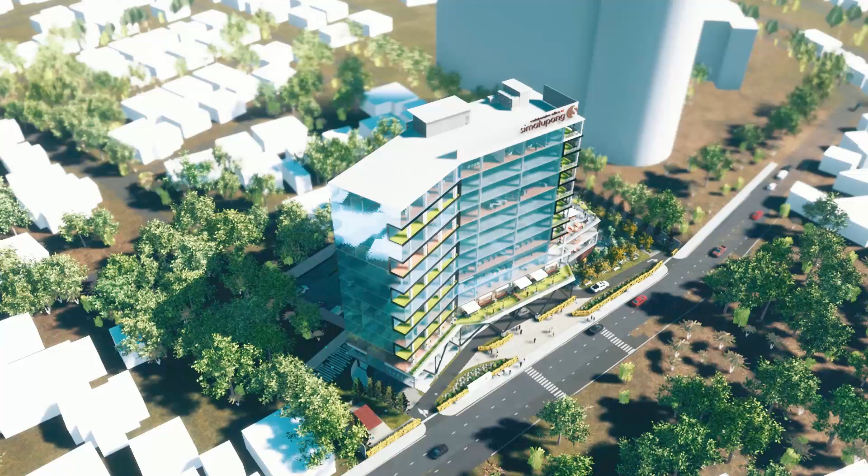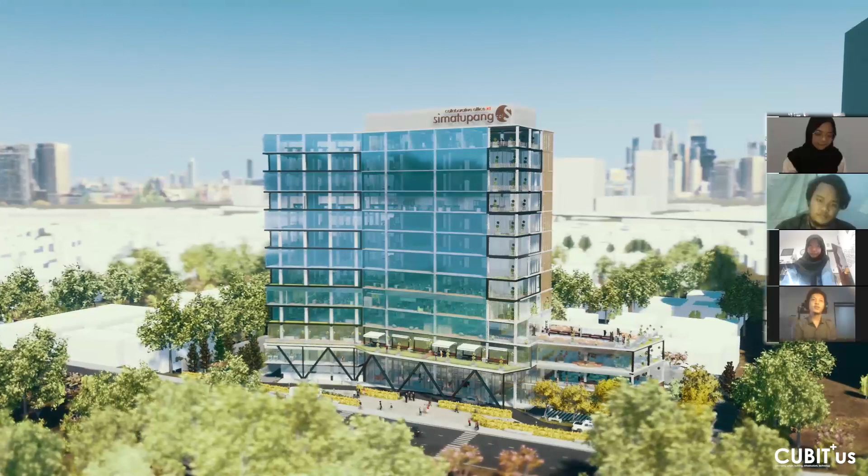Today's occasion, we want to present our project about Collaborative Office ID Simatupang. I am Ko Isriadi Olhak as the project leader. I am Adelia Bunaya, I'm Kamala Fitri Adelia. Me, Banu Arsyakila, as a member of CUBIT'us.

Moving to the project description, the Collaborative Office ID Simatupang is located in Jalan Nangka Raya, TB Simatupang, Tanjung Barat, Jagakarsa, South Jakarta, DKI Jakarta. The site area is around 4983 square meters and the building area is 13,989 square meters, and the budget is under 10 million.

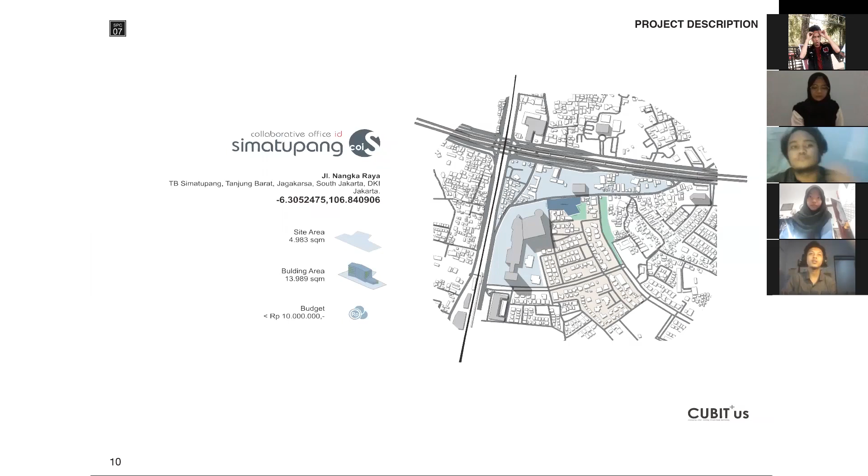Our building is located on Jalan Nangka Raya, near buildings such as Southgate Sinarmas and other office buildings, Universitas Tama Jagakarsa, Antam Building Residential, and Tanjung Barat Station, which is located near our site.

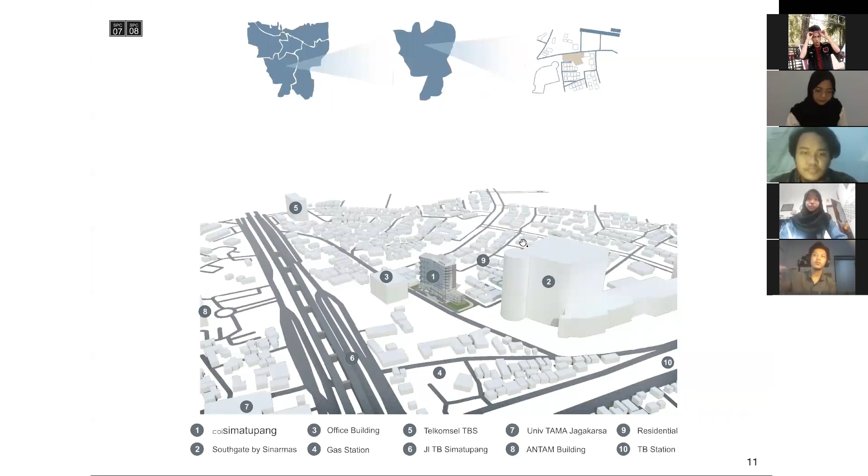As for neighbor context and access, our location is 500 meters from the main road of Jalan TB Simatupang, 700 meters from Pasar Minggu, Ragunan, Depok exit of Jakarta Outer Ring Road toll, and 500 meters from Tanjung Barat commuter line station. This will be the access going to our site.

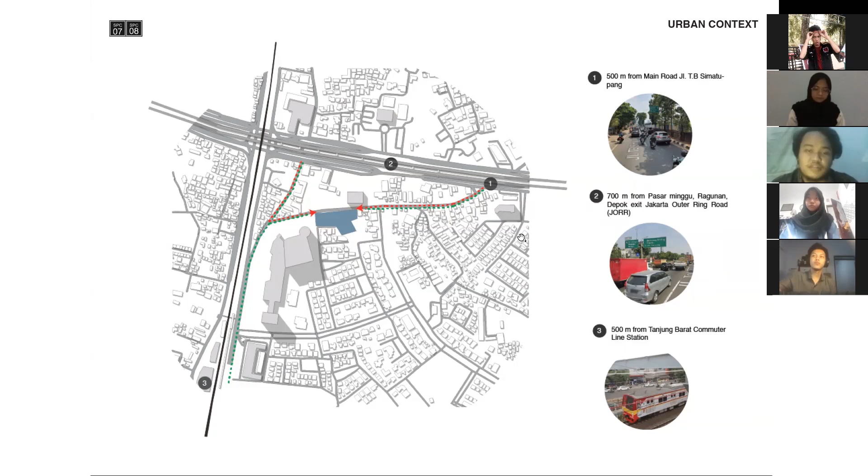Next is the building codes and regulations. Our ground floor ratio is 30%, and the floor area ratio is 3, which we maximize, along with the KTB and green coverage ratio. The site area is 4983 square meters and the building coverage is 1495 square meters. The maximum building height is 16 floors, and the basement floor ratio is 40%.

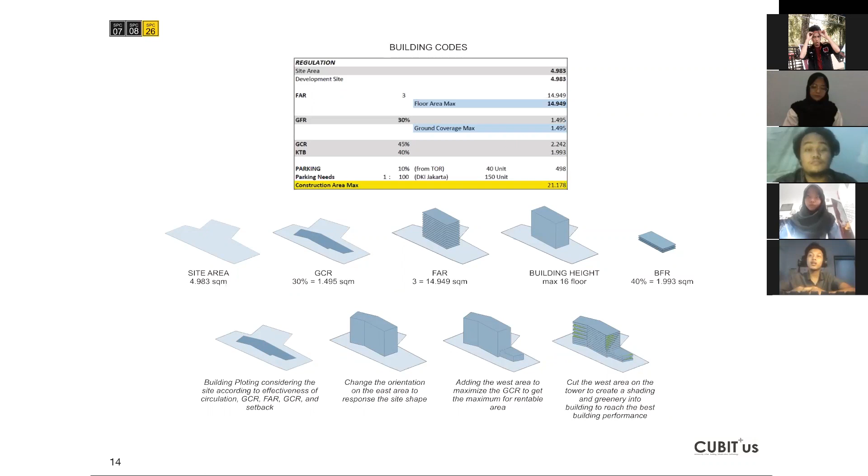For the building plotting, we considered the site according to effectiveness, changing the orientation on the east area to respond to the site, and adding the west area to maximize the ground coverage ratio to get the maximum rentable area. We cut the west area on the tower to create shading and greenery into the building to reach the best building performance.

For the typology and precedents, the first one we chose is Talavera Office Park as our precedent, located in TB Simatupang. The second one we chose is Satrio Tower, located in Jalan Profesor Dr. Satrio, Jakarta Selatan. For the third one we chose Google Office California as our precedent, located in California.

The reason we chose these three precedents: first, Talavera Office Park, because it has convenient circulation inside the building. Second, Satrio Tower, because it is a green building. Last, Google Office, because it has a fun office concept that we can apply to our building, and it is suitable with our concept.

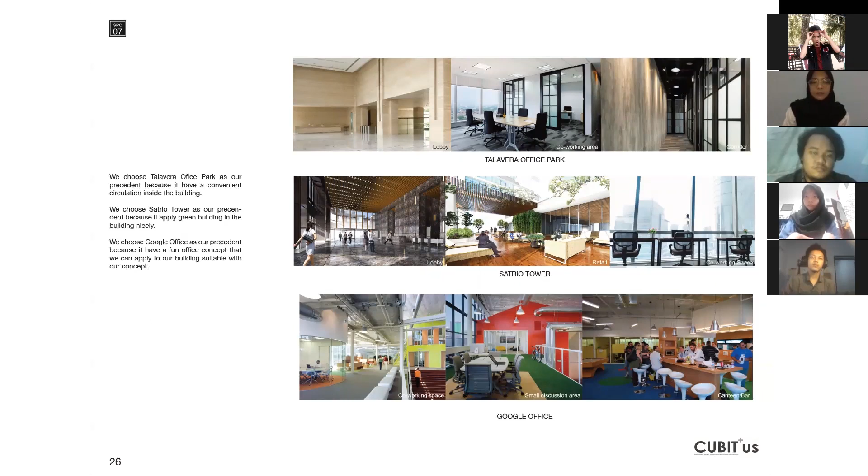Next is the TOR review. As you know, the rental office needs the process of working in a fixed office complete with a concept of co-working space and lifestyle, in accordance with the demands of millennial users, with single tenancy floor and multi-tenancy floor in the rental office, also providing co-working space that can handle medium and large office co-working areas. The office can also enhance productivity and give flexible activities and interaction with each other.

From the TOR, it's 5% needed for the entrance lobby, and we built 463 square meters. From the TOR it needs 999.

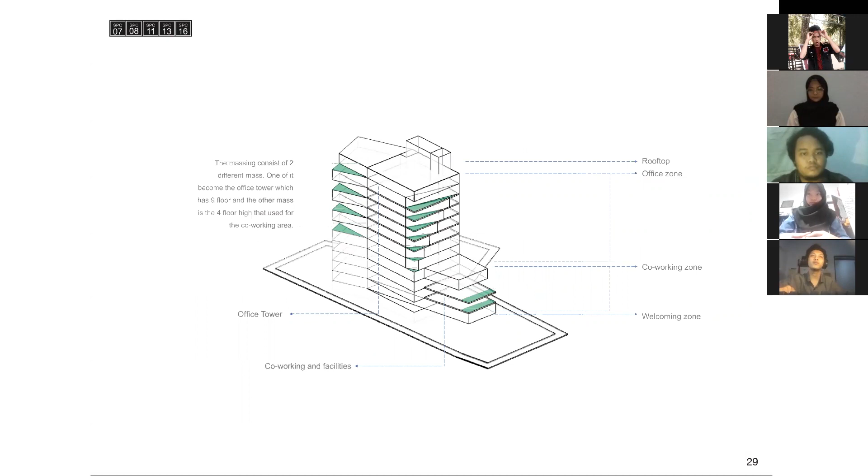This is the massing of our building. It consists of two different masses: one becomes the office tower, which has 9 floors, and the other mass is 4 floors in height, used for the co-working space.

Here's the property size. We have the office area around 8161 square meters and the co-working area around 2240 square meters, with the total building area at 13,989 square meters. The rentable area of our building is 74%. In the office we have 9 floors, in the podium 4 floors, and the basement 2 floors, for a total of 15 floors with a total height of 55 meters.

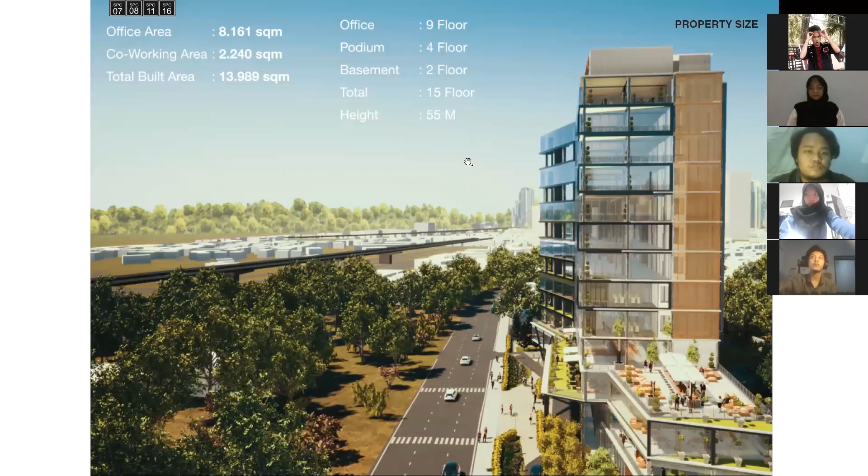Goes to the concept and idea development. We have the concept of interaction that creates collaboration, innovation, productivity, and enhances involvement and productivity.

We have the design approach for the industrial and green building. Why industrial? It has a unique aesthetic of honesty in the characteristic of its building material, expected to create an honest work ethic and bring up original ideas. For the green building, it can bring freshness for our mind and the physical.

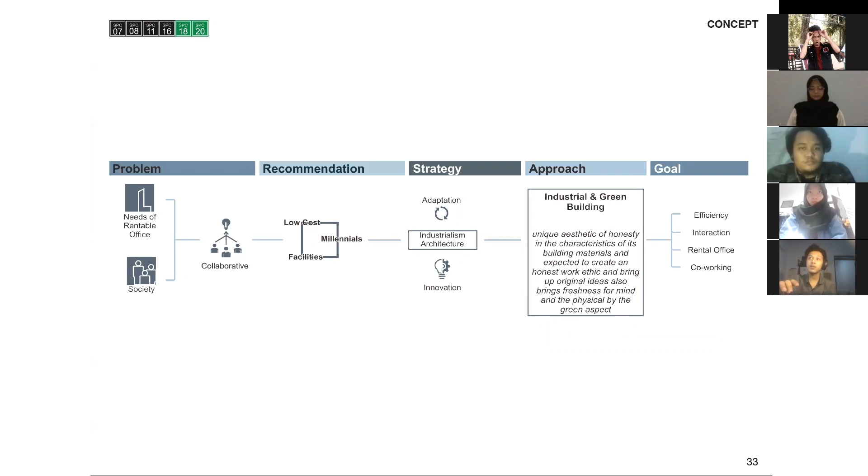We have the problem of the needs of the rental office and the society. For the recommendation, we need to get low cost for the millennials and provide a lot of facilities. Our strategy is industrialism architecture, our approach is industrial and green building, and the goal is efficiency, interaction, the rental office, and the co-working.

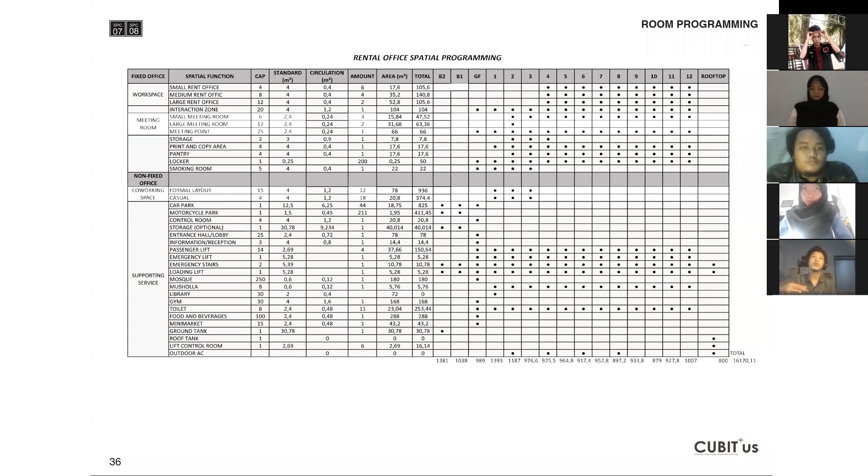For our room programming, we have the fixed office and the non-fixed office. The fixed office has the workspace and the meeting room, and the non-fixed office has the co-working space and the supporting facilities.

We have Tokopedia as our main tenant. Tokopedia is an online marketplace, one of the most influential. The building provides a space for the stores that have partnership with Tokopedia, so they will have easy communication between the owner and Tokopedia itself.

The calculation of the building system. For the structure, we use a steel structure as our main structural system, combined with a concrete system, mostly for the basement area.

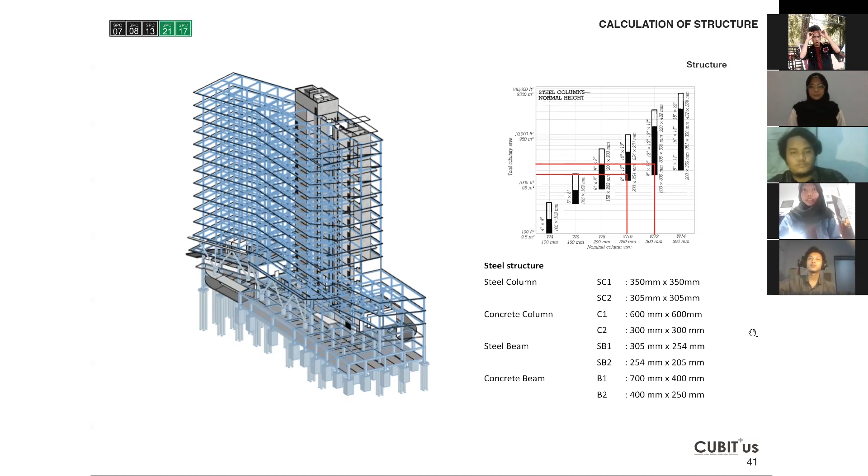Parking calculation, based on the TOR, the client needs 10% of the parking area consisting of drop-off and indoor parking area. For the drop-off, we have 6 cars in total with an area of 112.5 square meters. The car parking area has 825 square meters with a capacity of 44 cars, and the motorcycle parking ratio is 1 per 3, with a capacity of 211 motorcycles.

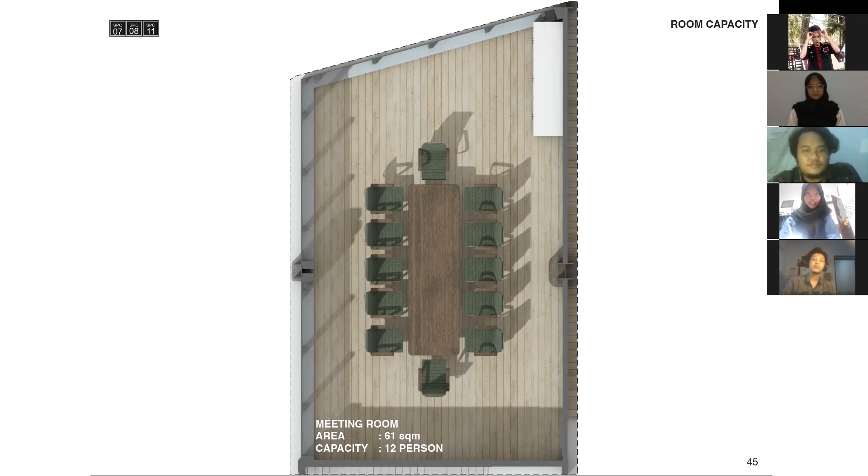This is the room capacity. The meeting room has an area of 61 square meters and a capacity of 12 persons. Next is the large room, with an area of 130 square meters and a capacity of 12 persons. Next is the medium one, smaller, for only 8 persons with an area of 100 square meters. And the small office consists of only 4 persons with an area of 60 square meters.

Based on this calculation, you can see that we use 4 lifts.

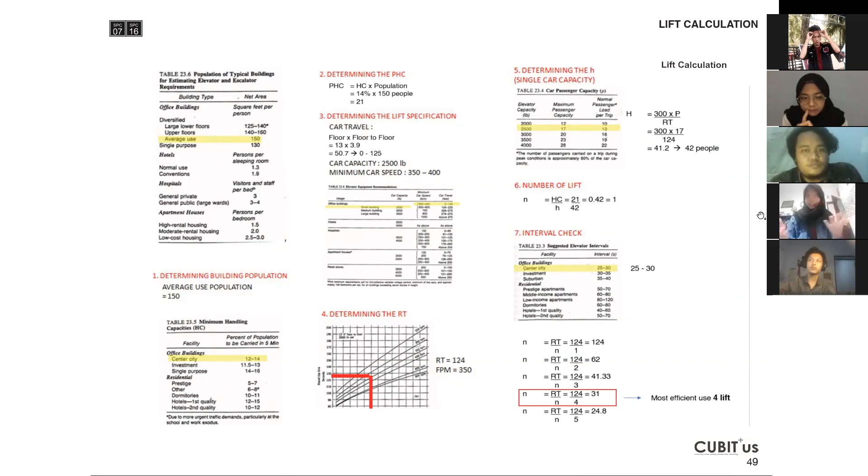For the welcoming zone, service equipment, and co-working zone, we have the entertainment, mosque, food and beverages, gym, and co-working area that consists of indoor and outdoor co-working.

In the office, we have the main tenant on 2 floors, and the rest is multi-tenant office. In every office, we have the green balcony at the west part of our building.

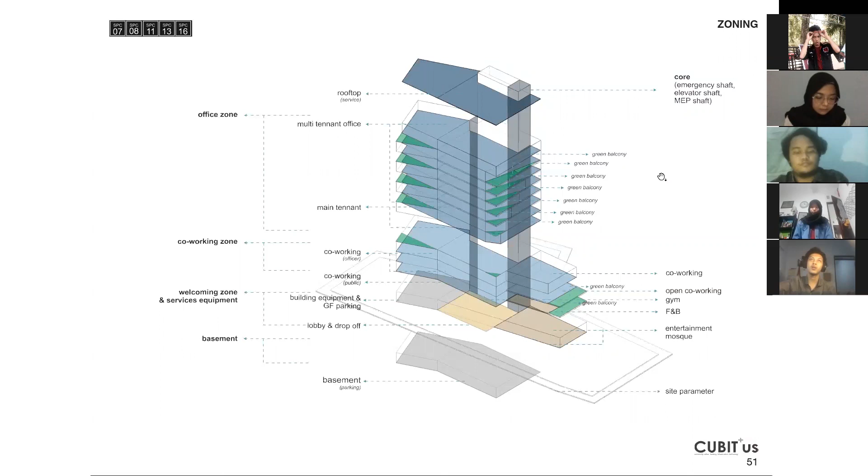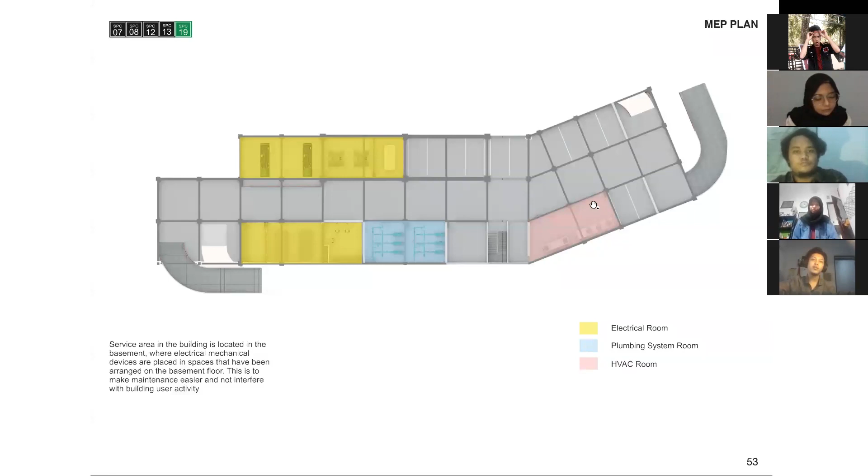For the barrier-free concept, easy access must be achieved for persons with disabilities, starting from the entrance, the site entrance to the building. There's a guiding block that's helpful for them.

In addition, we have ramps that increase the ease for persons with disabilities to enter the building, placed on the side of the building. The yellow one is the guiding block, the blue one is the diffable ramp, and the last is the diffable parking. We have 6 disable parking spaces in total.

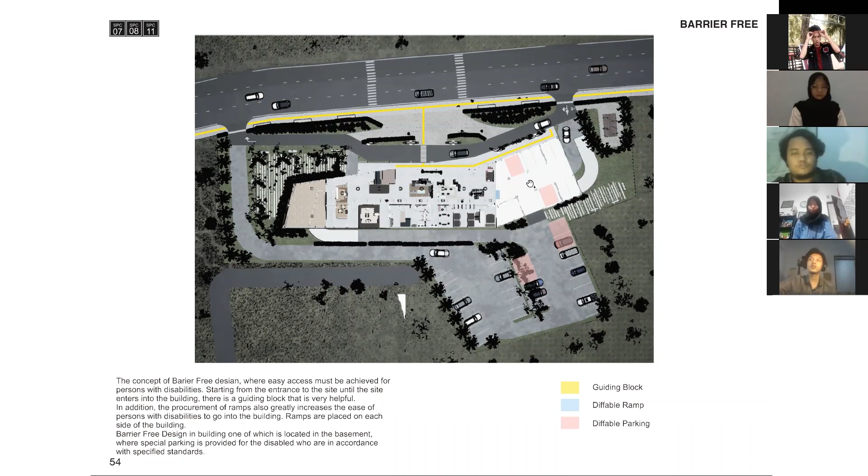For the module, it's based on the structural material, plumbing material, flooring, ceiling material, and many more.

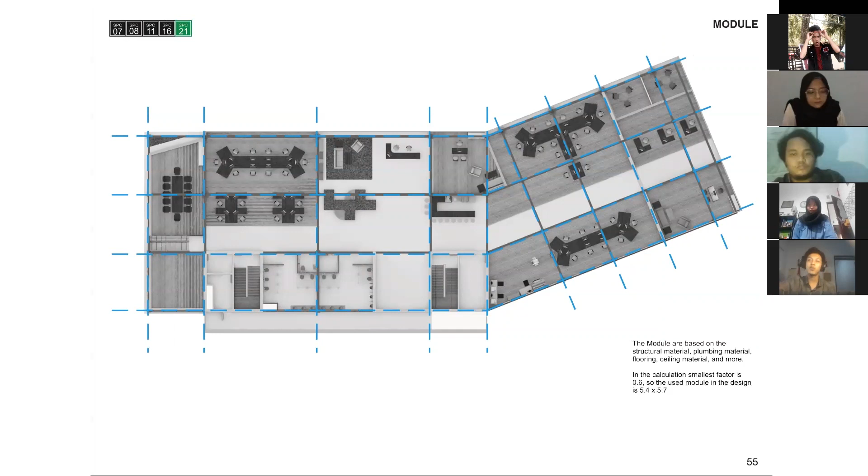In the calculation, we got the result of the smallest factor at 0.6, so we use the module in design that is 5.4 meters by 5.7.

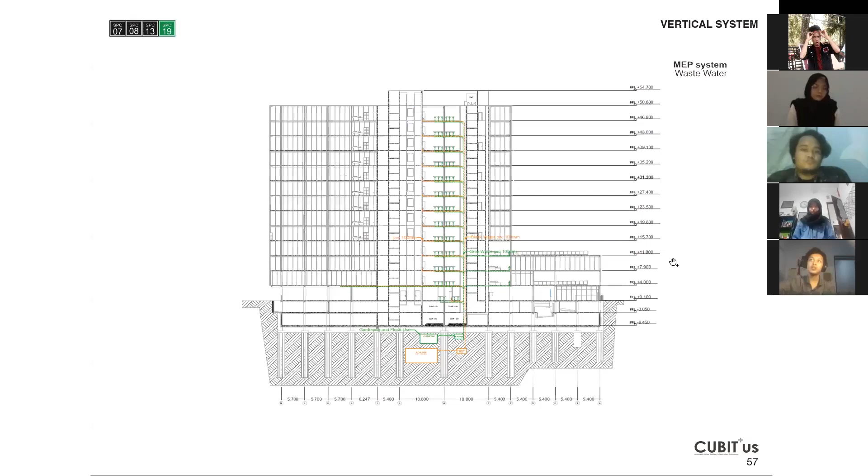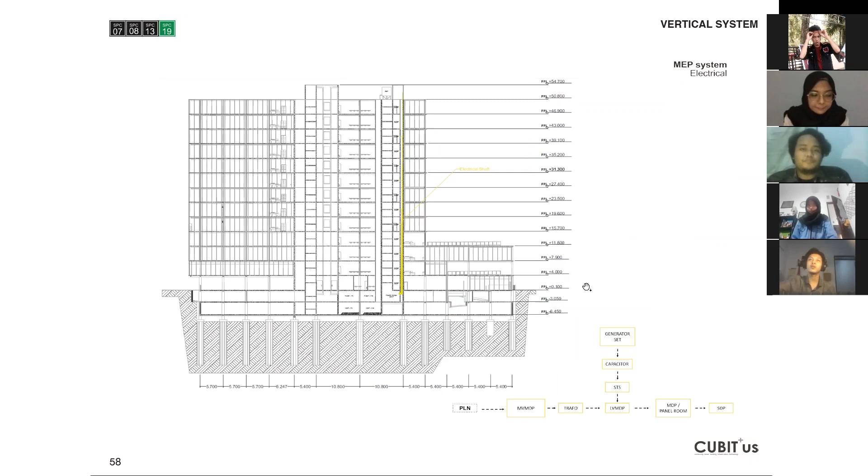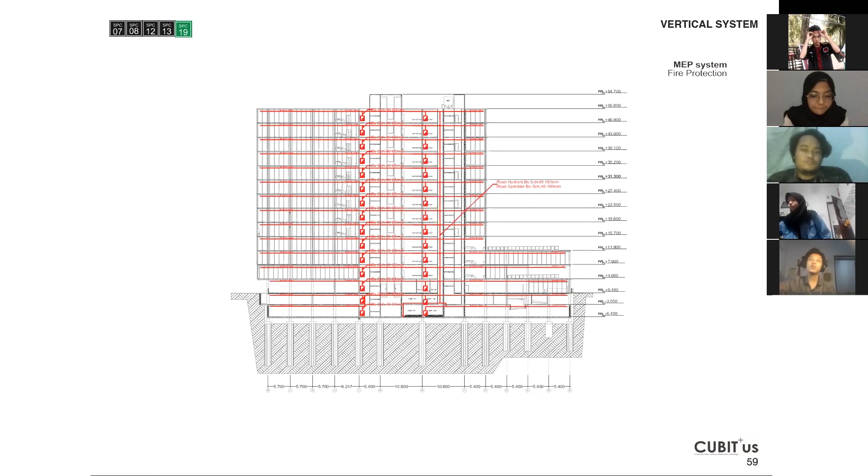And goes to the SDP on every floor. This is for the fire protection. We have water from the groundwater tank for the fire hydrant, pumped with the pump in the pump room, and then distributed all over the building to the sprinklers and also the fire hydrant.

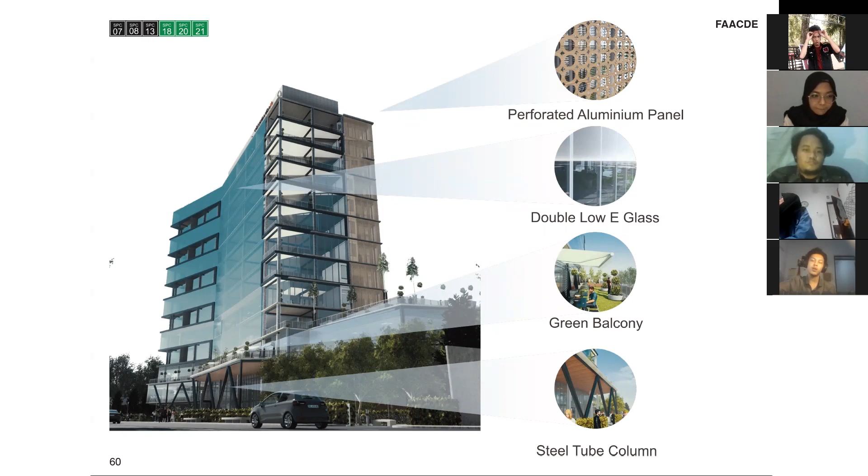And then goes to the facade. We are using the perforated aluminum panel, double low-E glass, green balcony, and also steel tube column. The green balcony provides freshness of mind for the occupants.

For the green building aspect, we use these three elements. The first is double low-E glass. It reduces the heat from sun radiation to create a comfortable condition inside the building, and also reduces the energy use for air conditioning. It also maximizes natural lighting penetration, which helps reduce energy use inside the building.

For the ACP secondary skin, we are using the perforated aluminum panel. It reduces sun radiation while keeping light coming into the building. The last element is the green balcony, which brings greenery to every level to give freshness to the occupants while they are working.

The next is our design development. The first plan is the basement 2 plan, which consists mostly of parking area for both car and motorcycle. On this floor, it is also used to store the groundwater tank.

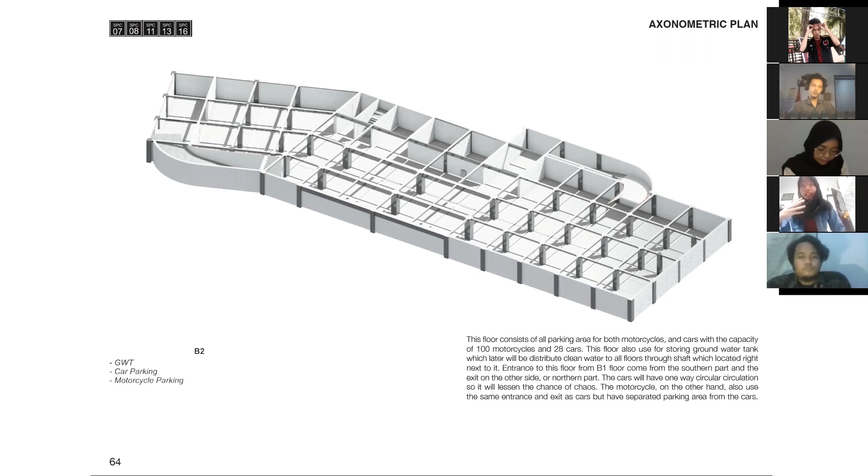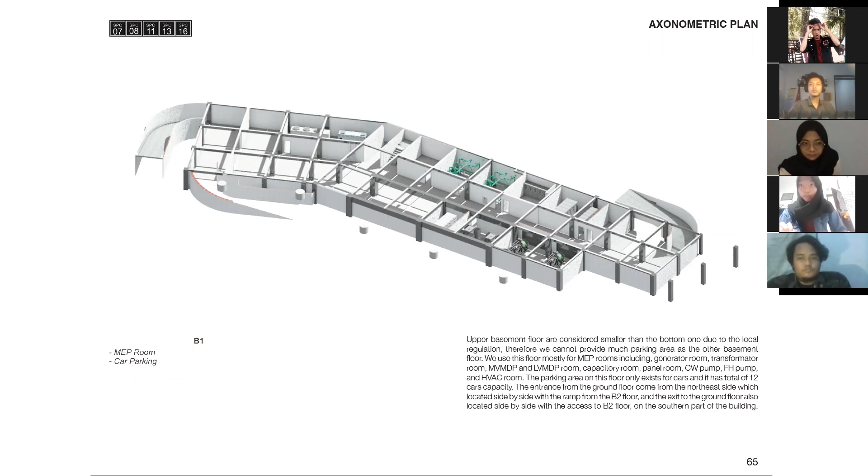The next is the upper basement floor, and this is considered smaller due to local regulation. Therefore, we cannot provide as much parking area as the other floor, and we use this floor mostly for MEP rooms.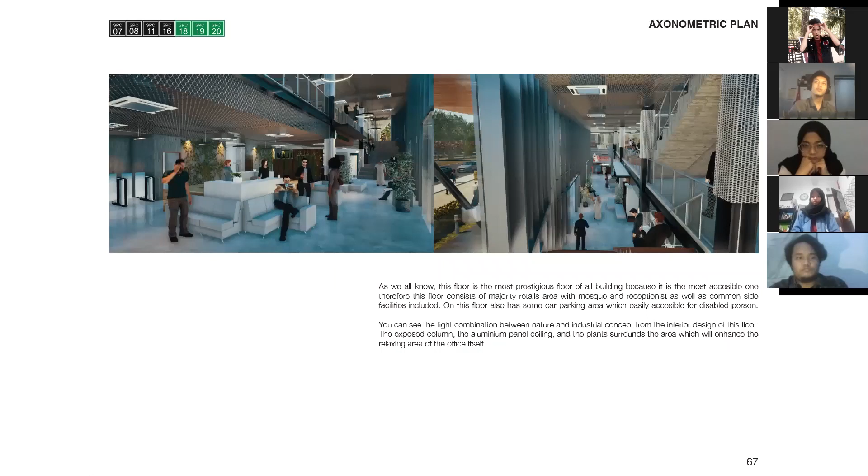Going to the first floor, it consists of indoor and outdoor co-working spaces. On the right side, you can see circular sofas, and we have food and beverages as well, and a gym. We also have retails under the stairs.

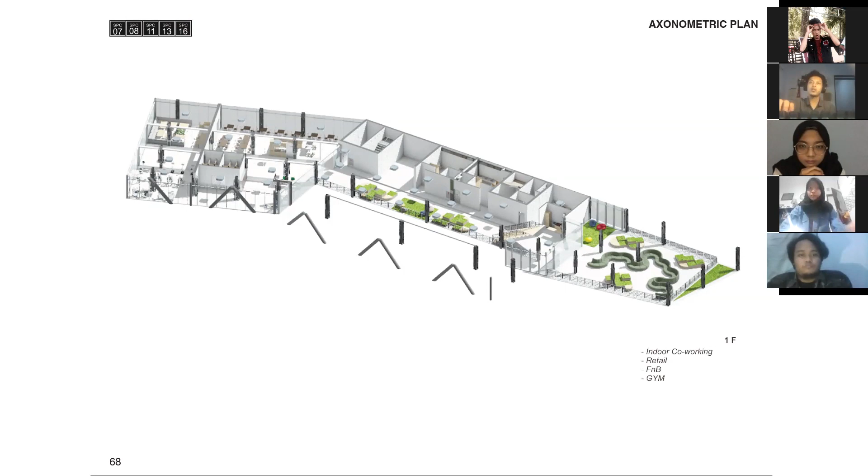You can see right here the co-working space that is available starting from this floor until the third floor. On the right picture, you can see the lobby area through the railing. On the left side, there's a more casual co-working area located outdoors, showing the implementation of our concept.

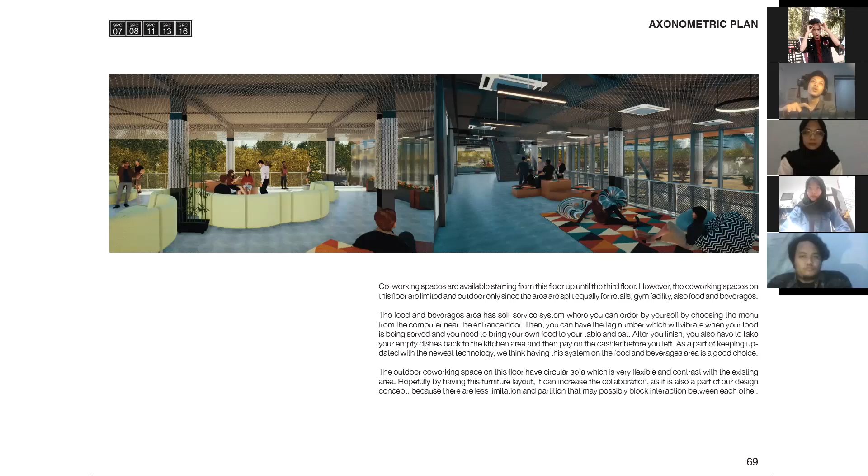The next is the second floor. Here we have outdoor co-working, indoor formal co-working, and an entertainment area. The second floor has the biggest area of co-working space compared to the other two floors. There are also small linear co-working spaces on the northern side of the building, which has a view of the main street.

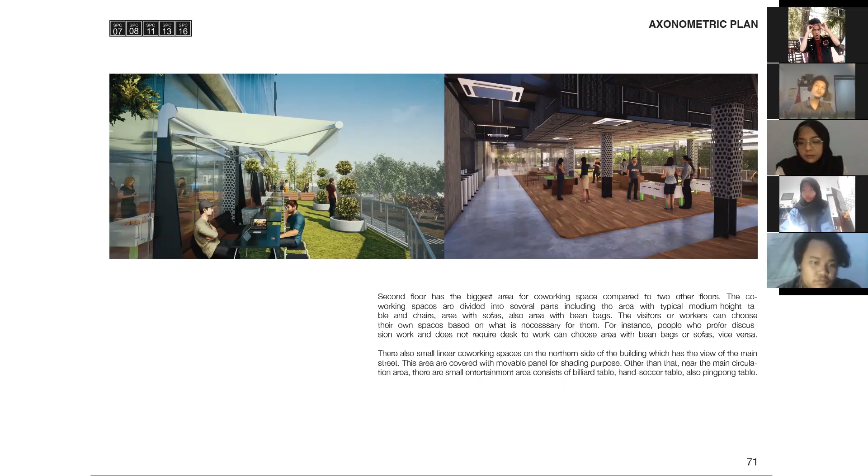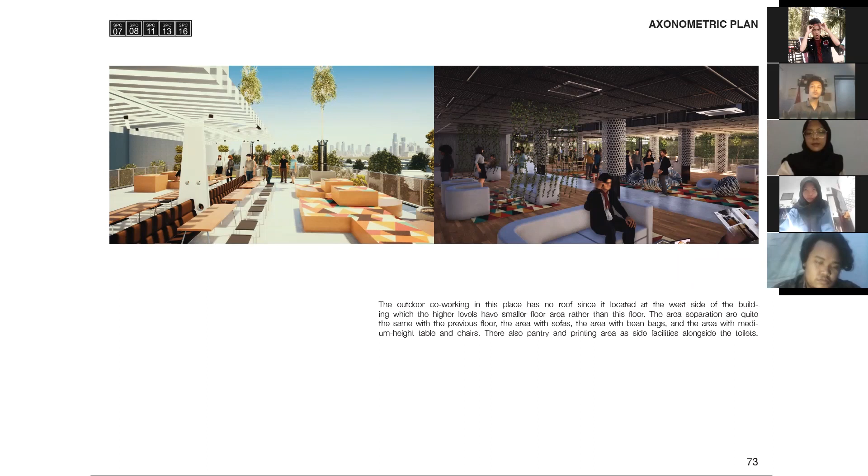Near the main circulation area, there is a small entertainment area consisting of a billiard table, hand soccer table, and ping pong table. The next is the third floor, which has indoor and outdoor co-working space. The outdoor co-working area on the third floor has no roof. There are also a pantry and printing area as side facilities, alongside the toilet.

Starting from the fourth floor, this area will function as an office, specifically as the office of our tenant, Tokopedia. It consists of a lobby, single workstation, multi-workstation, private office, meeting room, and communal spaces. Starting from this floor up until the fifth floor will be occupied by the tenant, providing the design of Tokopedia with green as the main color, reflecting Tokopedia itself.

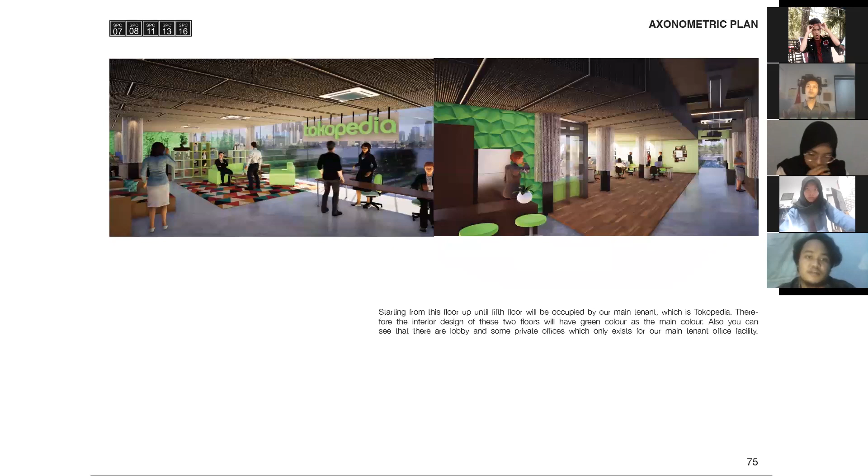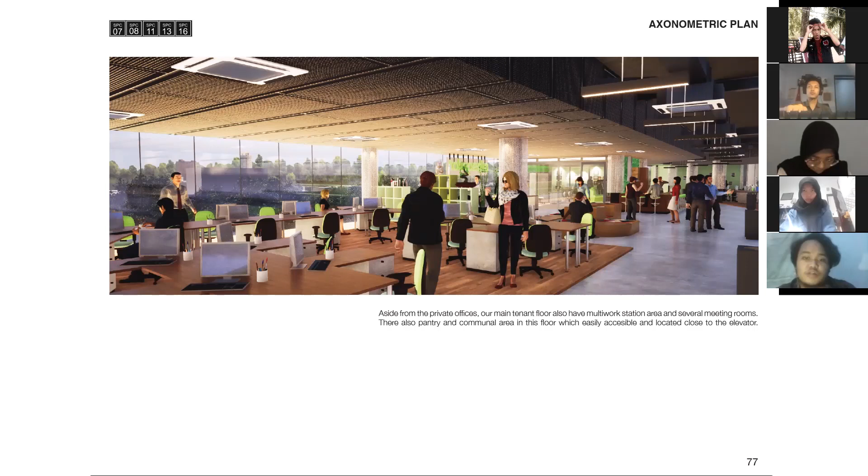On the fifth floor, also functioning as the Tokopedia offices, it consists of single workstation, multi-workstation, private office, meeting room, and communal spaces. The fourth floor also has a multi-workstation area and several meeting rooms, plus a pantry and communal area that is easily accessible and located close to the elevator.

Starting from the 6th floor until the 11th floor, this will be used as multi-tenant rentable office space. It consists of one large communal space next to the main circulation, one large office, two medium offices, and three small offices. Besides the offices, this floor also has side facilities such as toilets, musola, printing rooms, and pantry.

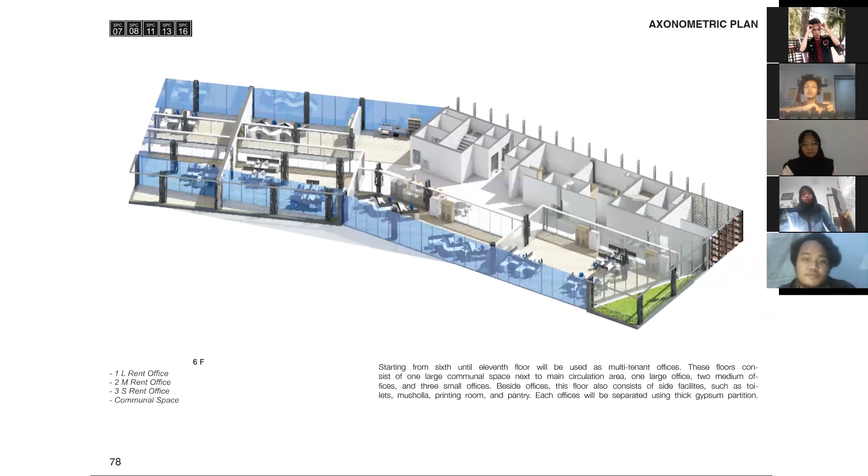On the 12th floor, it also functions as an office, but here there are three rentable meeting rooms, and also a communal sky view on the west side. This floor has quite the same layout as the typical floors, but some rooms were cut off because of area differences.

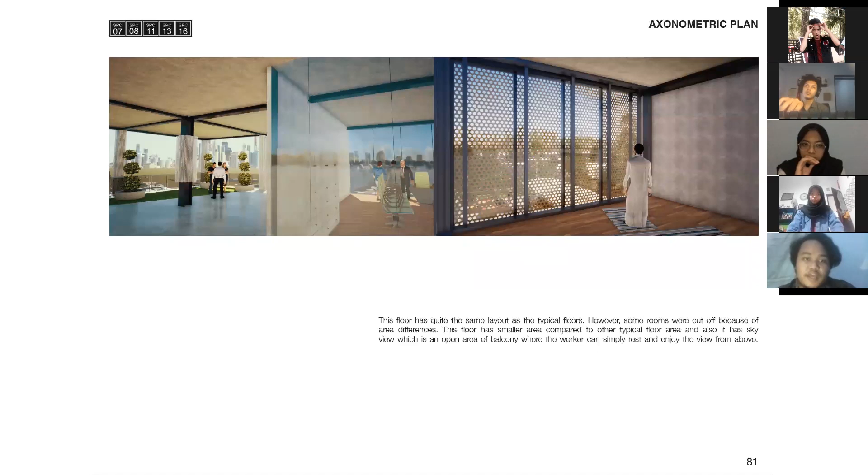As you can see on the left side, there is a picture of the sky view, so the workers can enjoy this sky view that we are providing in our design. On the rooftop will be the elevator machine room, building maintenance unit room, and also roof tank and pressure fan. Here is our elevation.

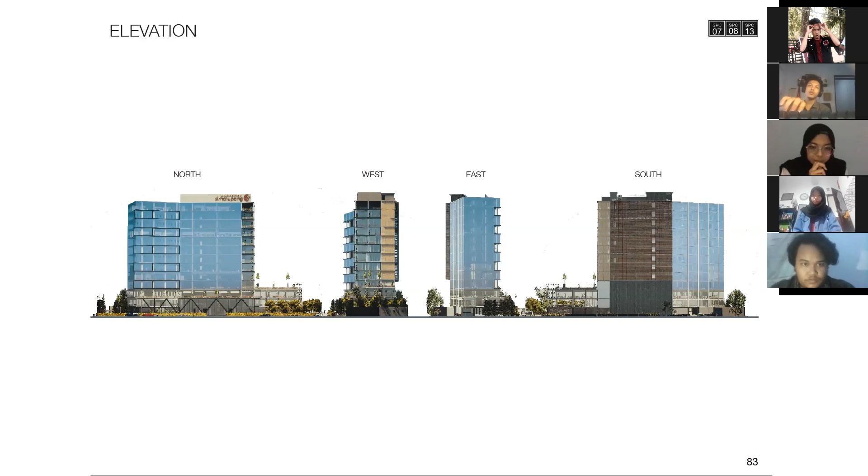You can see from the north the building name. Then from the west, you can see our building, and that's from the east side and also from the south side. This is our section.

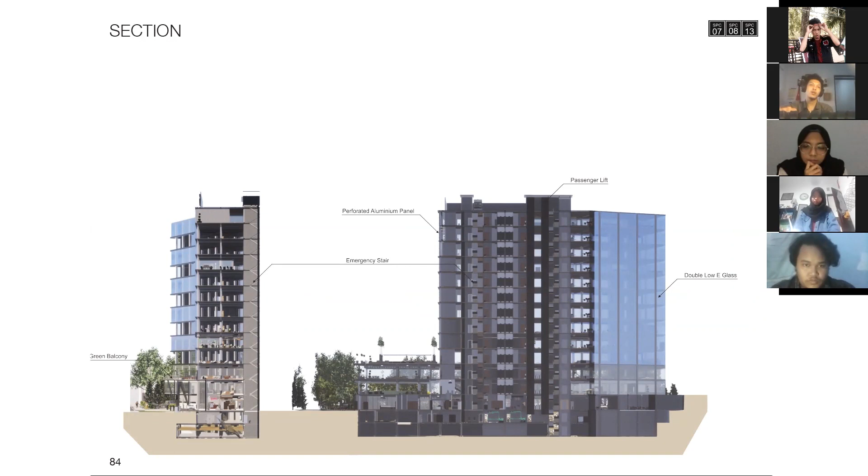There's the emergency stairs, and we have the perforated aluminum panel, and also the passenger lift, and we are using double low E glass. You can see on the left section, the green balcony also facing the front of our building.

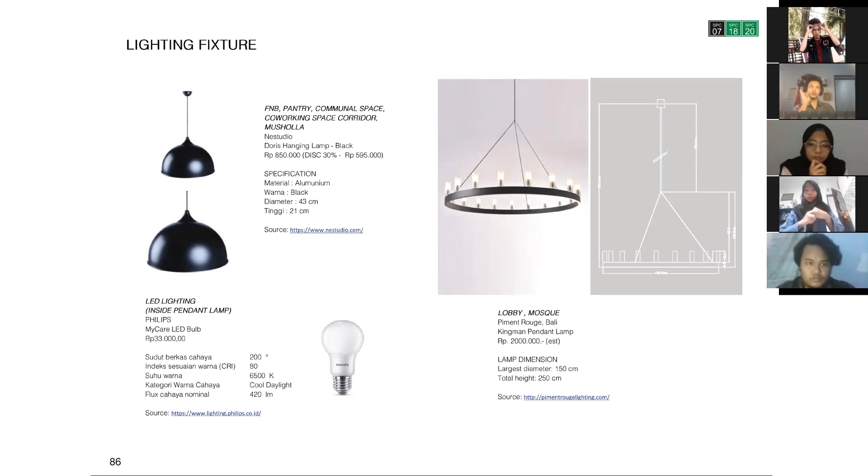Next goes to the material specification. First we go to lighting fixtures. There are two kinds of pendant lamps. The small one is used in F&B, pantry, communal space, co-working space, corridor, and musholla, while the big pendant lamp is used only in the lobby and the mosque.

The LED lighting used for the big pendant lamp, and the LED lighting on the right side is used for the office area. Downlight is used in retail, gym, toilet, and management room. For the circulation lighting, we use the bar lamp for all circulation areas.

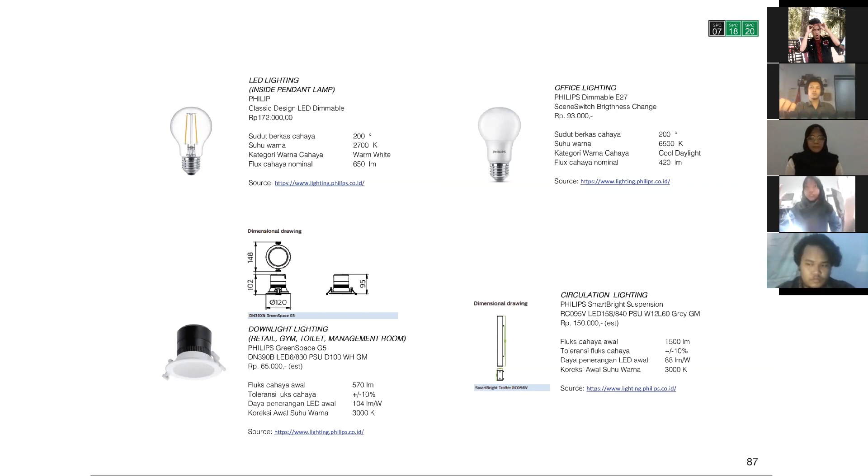Next is the sanitary fixture, mostly using American Standard. For the wastafel, we are using a set from American Standard. For the wall tap, we are using Air Koran Tembok. For the floor drain, we are using American Standard.

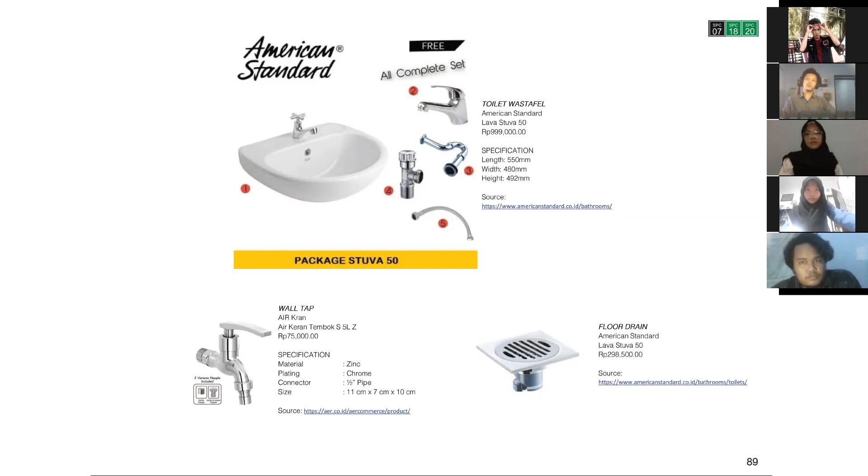For the painting, we are using epoxy coated floor for the flooring, and we are using Propan Zebra and also Propan Metal Coat for the structural painting for the steel.

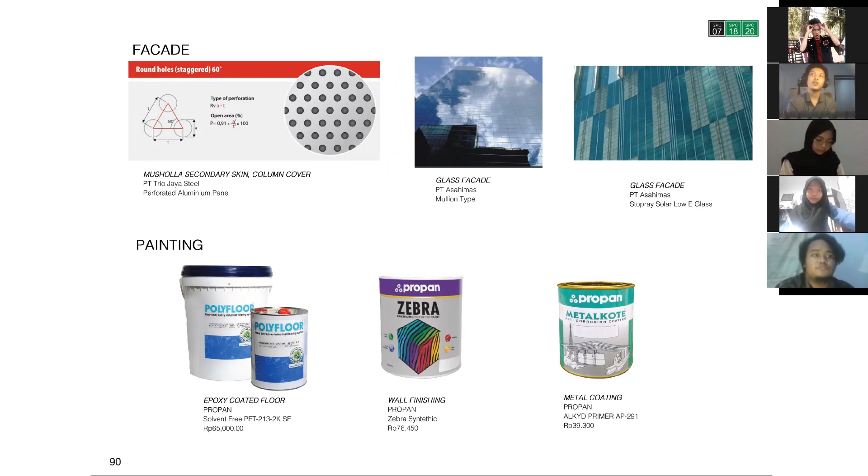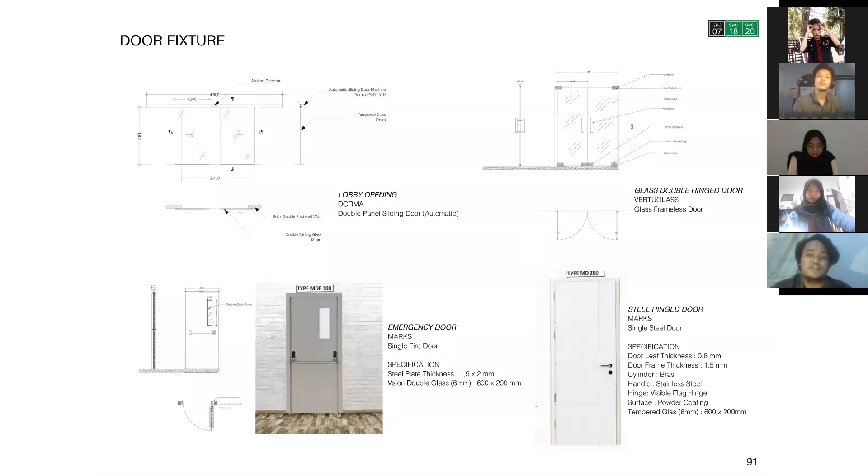For the opening or fixtures, we are using automatic sliding doors, and for the machine itself we are using Dorma. For the glass double hinge door, we use installation from Vertuglass with Asahimas Glass Indoflat. For the steel door, we use Marks Indonesia, consisting of emergency doors and steel hinge doors that function at the entrance of the MEP room, security room, and so on.

Next is flooring. We are using Roman ceramic tiles. For the lavatory and janitor, we use Roman Venere mocha type, and for the ablution area, we use Venere dust. For the mosque and office area, we use parquet floor from PT Rajawali Parquet Indonesia. For the panel room, manager room, and security room, we use Roman floor tiles. Next is the ceiling.

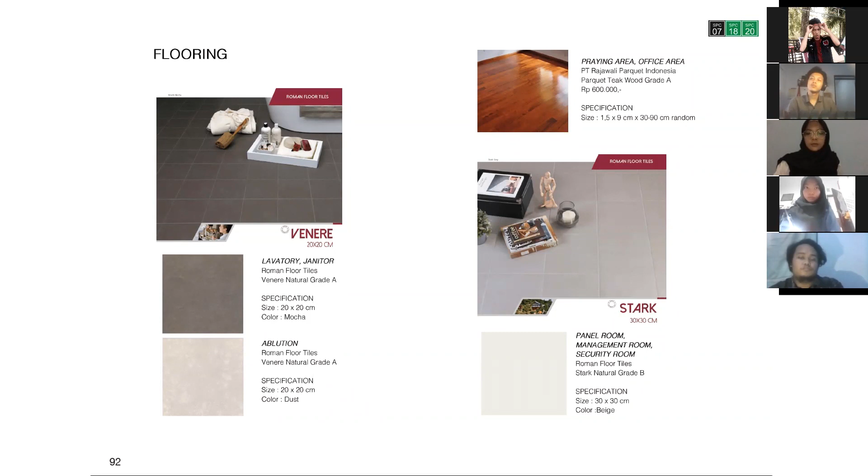We have 4 types of ceiling. 2 of them are from USG Boral Jaya series. The gypsum tiles we use are Jaya Dura Condado, used for toilet and F&B ceiling. For the office room and meeting room, we use gypsum board Jaya Board Sheetrock. And for the praying area, both in the mosque area and musola, we use Shunda PVC ceiling.

For the co-working spaces, lobby, and office floors, we use expanded aluminum ceilings from PT Trio Jaya Steel.

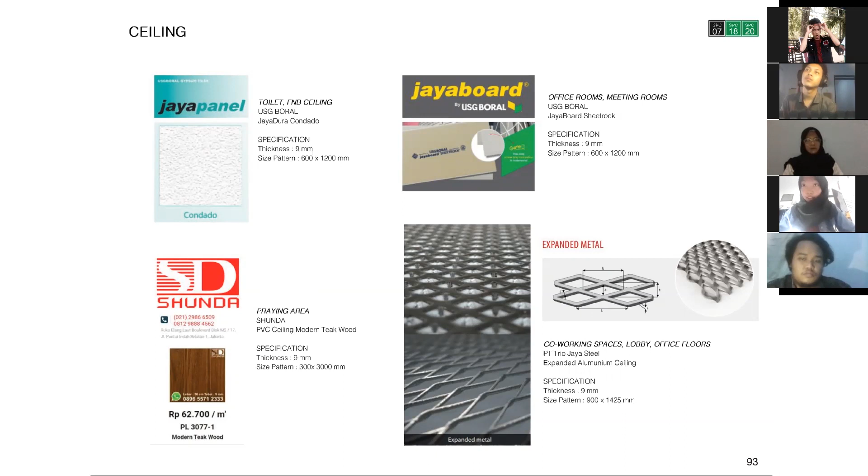And this is the office furniture. We use office chairs from Starindo Furniture, the workstations, both cubicle and solo workstation, from Bush Business Furniture, and the cupboard we use Orbitrend.

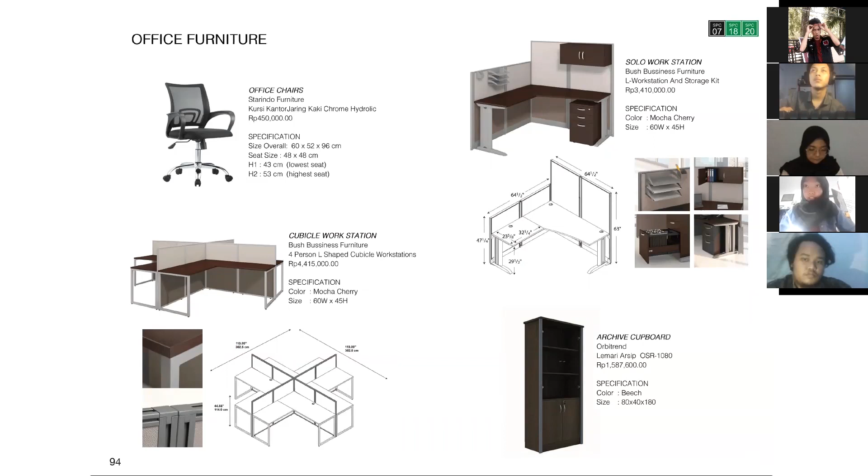And the lobby furniture, we have the receptionist desk from Latitude Run, and the sofa - there's a 2-seat sofa from Klippan, and the other one is from YPO.

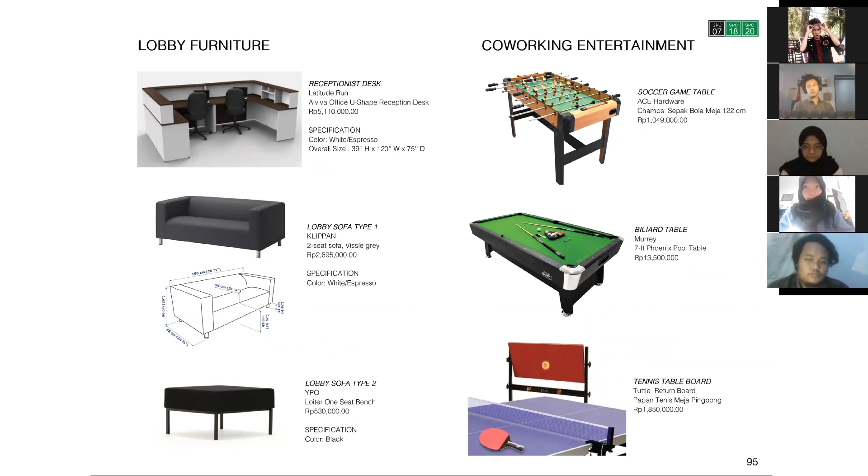For the co-working entertainment, we have 3 kinds of entertainment tables. One is the soccer game table from Ace Hardware, the other one is a billiard table from Murrey, and the last one is a tennis table board from Tuttle Return Board.

For the co-working furniture, there's a sofa bed sitting on the floor from Flottebo, and the circle sofa from Contemporary Furniture. There are also co-working sofa mats for the sofa area - we use Think Rugs. For the bean bags, we have Fabelio bean bags, cozy.

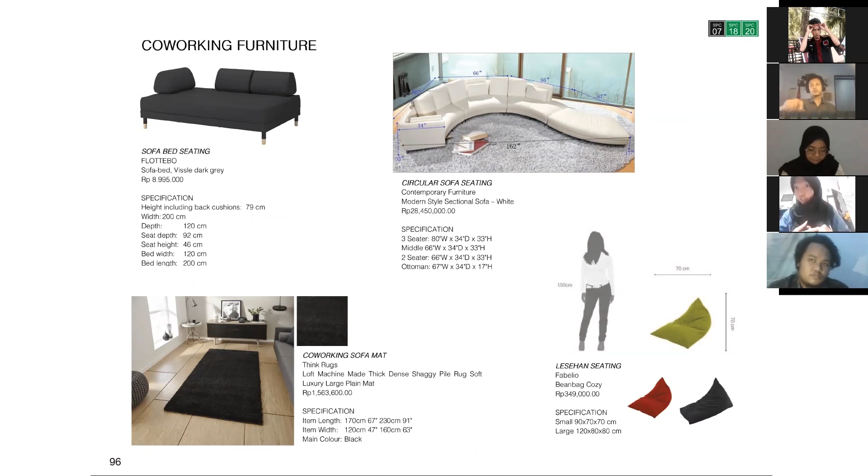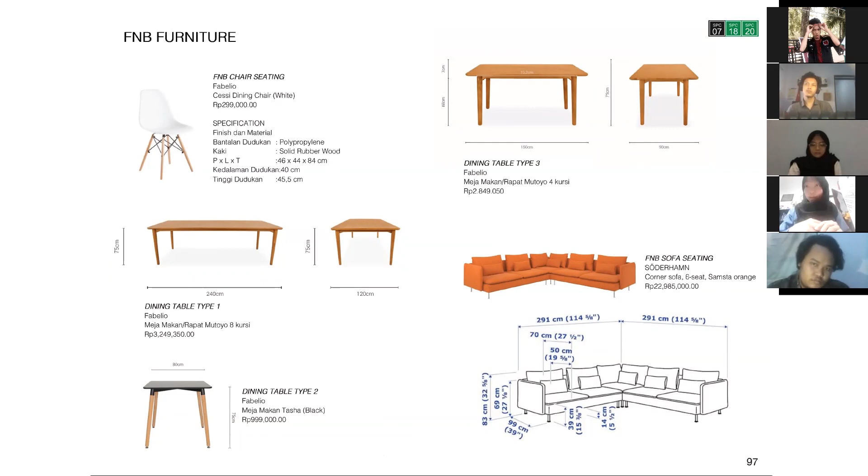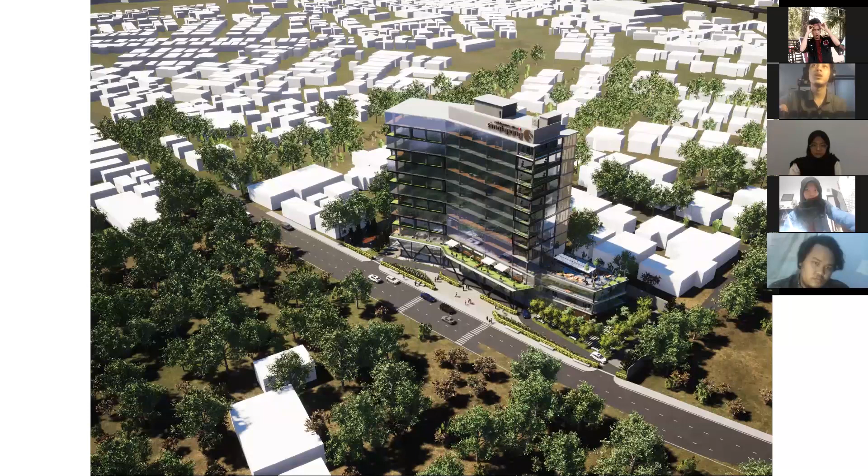So this is the aerial view of our building. Moving to the exterior, we have the community garden on the left, and this is the front view from across the road. Here's also our exterior rendering.

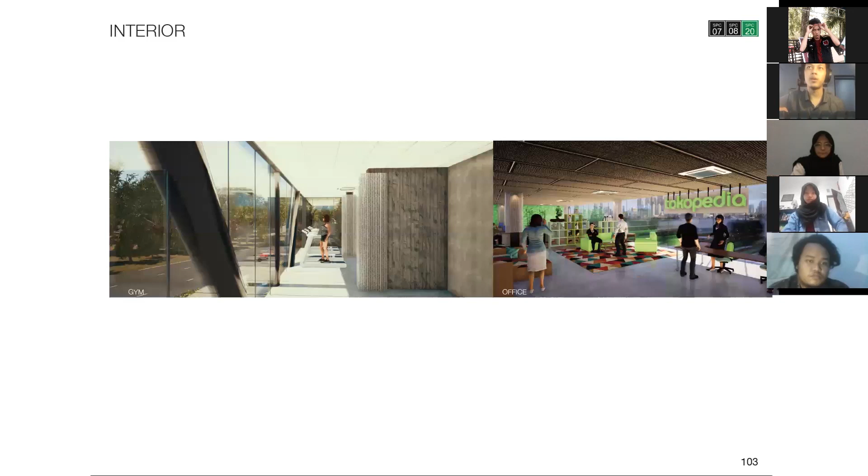Yes, the interior - some of it. We have the gym on the left facing the road, and also the Tokopedia offices. Here's the Tokopedia lobby with exposed ceiling.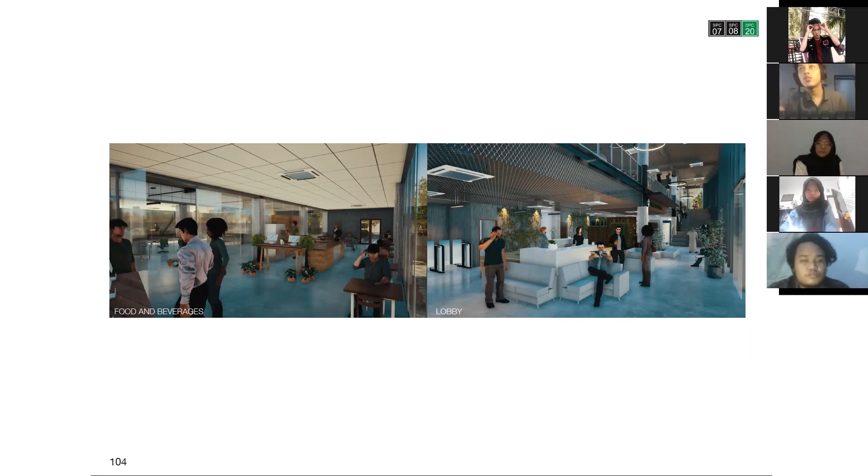Here's the food and beverages - it's self-service food and beverages. Here's our lobby from the front, and you can see the combination between the industrial concept and also the green aspect.

And then we go to the budget plan for the final recapitulation. For the preparation works, we have 3.1 billion. For the soil works, we have 1.2 billion. For the structural work, we have 56.6 billion.

For the architectural and mechanical electrical plumbing works, we have 79.8 billion. For the landscape works, we have 3 billion. So the total works is 144 billion, plus 10% tax, around 14 billion. And for the final budget, we have 158.451 billion rupiah. So for the price per square meter, we achieve 9.7 million.

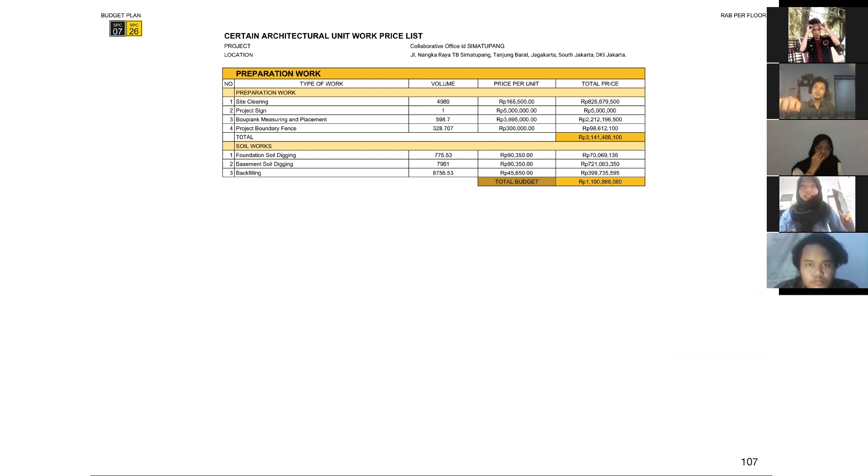Here's the detail: for the preparation work, we have a total of 3.1 billion, and the soil works we also have 1.190 billion rupiah. For the structural work, the basement 2 has a total of 18.1 billion rupiah, basement 1 has 2.9 billion rupiah, and the ground floor has a total of 3.4 billion rupiah.

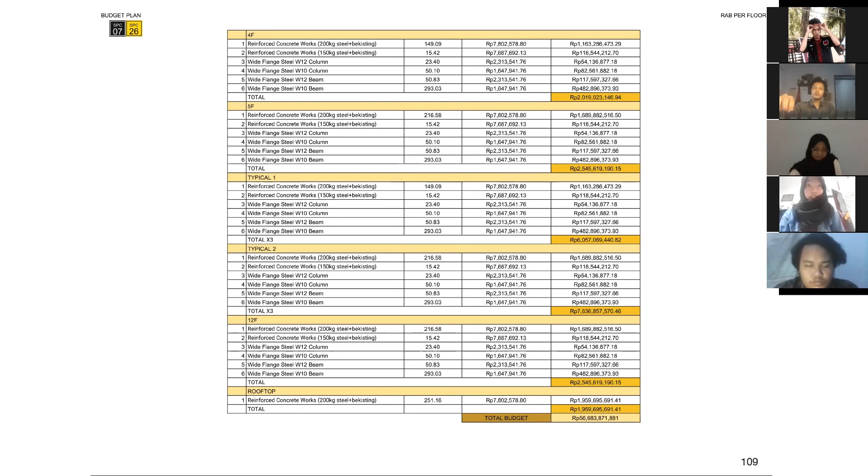The first floor has 3 billion rupiah, the second floor also 3.1 billion rupiah, and the third floor around 3.1 billion rupiah also. The fourth floor has quite less, 2 billion rupiah. The fifth floor has 2.5 billion rupiah, and there are two kinds of typical floor. The first type has a total of 6 billion rupiah, and the second type has 7.6 billion rupiah. The last is the Skyview floor, the 12th floor, with 2.5 billion rupiah, and the rooftop has 1.9 billion rupiah. So the total budget of the structural works is 56 billion rupiah.

Here's the basement floor, it has a total of 4.2 billion rupiah. The ground floor has a total of 9.4 billion rupiah. This is the first floor with a total budget of 6.6 billion rupiah. The second floor has 7.4 billion rupiah. The third floor has 5.8 billion rupiah.

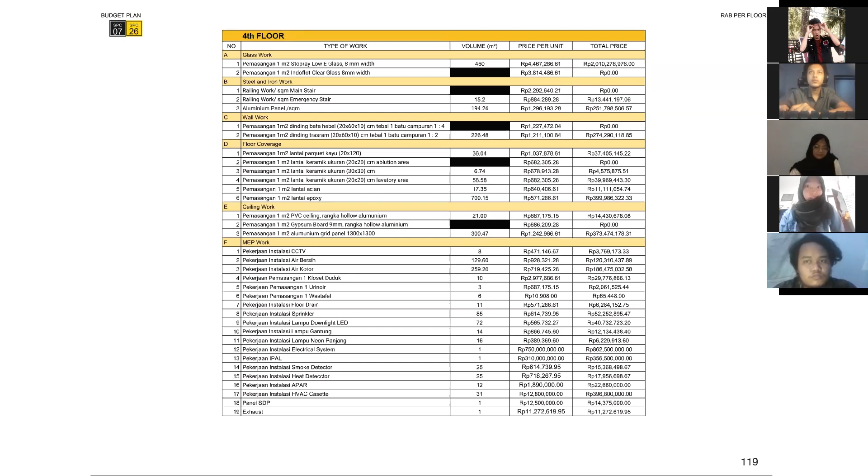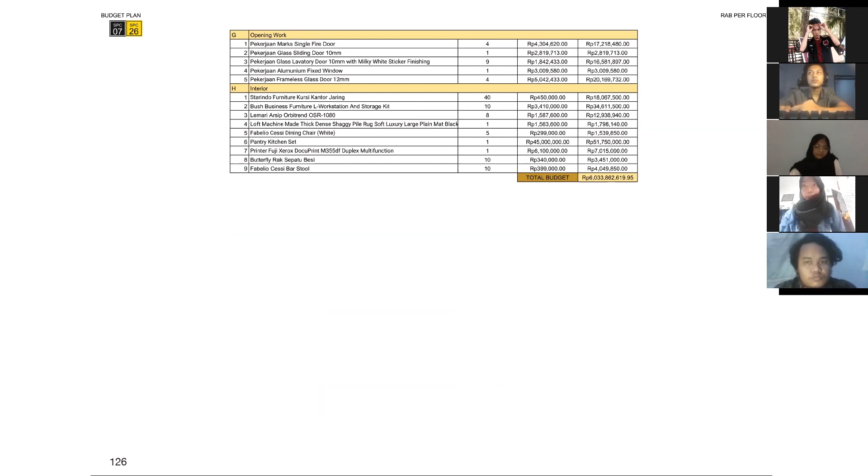Next is the fourth floor for our maintenance - we have 5.8 billion rupiah, and the fifth floor 6.1 billion rupiah. The next is the typical floor - we have the total, already multiplied by 6, so we have 30.728 billion rupiah. For the 12th floor, we have 6 billion rupiah, and the rooftop, we have 644.6 million rupiah. Okay, that's all about our building, the Collaborative Office ID Simatupang.